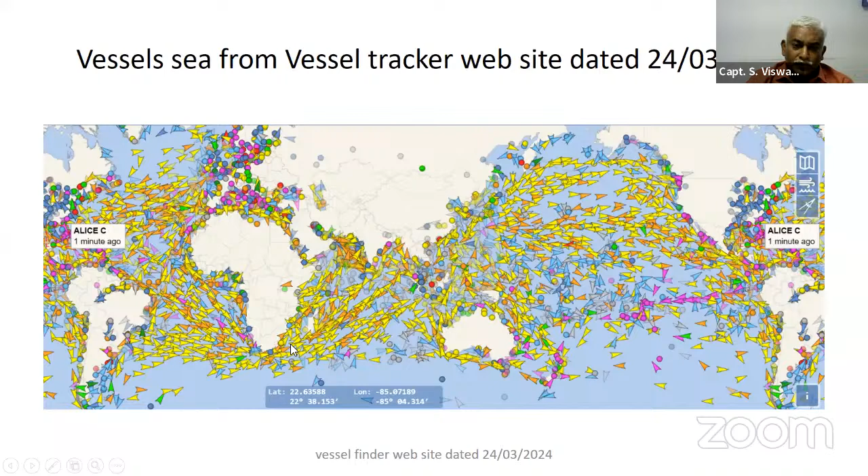When you zoom in, you will be able to see the kind of vessels plying in the seas. With this concentrated amount of vessels, how much has the sea been used for human purposes? So we have to begin with some early trade history, to understand how we have come to this level of shipping and where we have to think about sustainable shipping.

We have a lot of evidence in the Sangam literature, from around 2000 to 2500 years back, that trade used to take place through land as well as through sea, but the sea was the main route ensuring peaceful trade.

For that trade, they used to use monsoon winds, that was the advantage. About 2000 years back, there was no trade taking place across the Pacific or Atlantic Oceans, but through the Indian Ocean it was happening, mainly because of the trade winds and monsoon winds. These two winds ensured that a pattern was set for the trade.

Around 200 to 250 vessels from the Red Sea area, near Egypt or Arabia, used to depart during the southwest monsoon, come and trade in India, and when the northeast monsoon set in, all the vessels would return to the Red Sea. From there, they carried cargo through camels, transported it to the Mediterranean Sea, then took it to Rome or Greece.

That was the kind of pattern there. The pattern was set yearly, very well established, and the cargo trade was very much flourishing in this system.

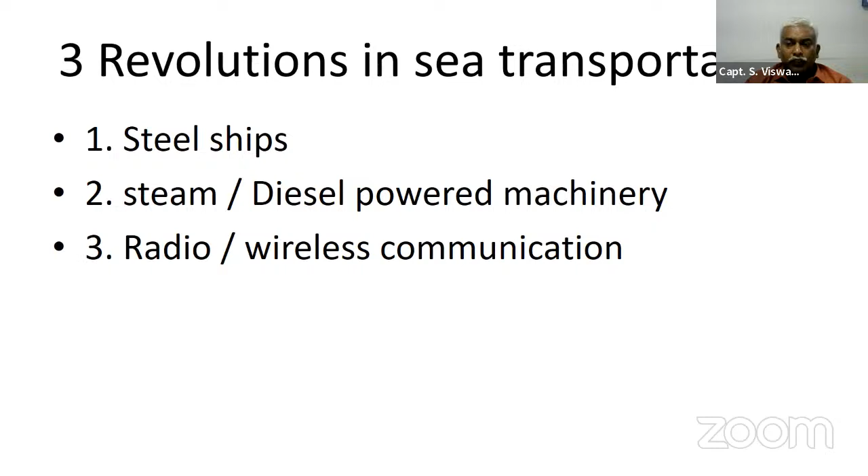Now we have to see what kinds of ships we have. Earlier, there used to be only sailing vessels. Now we have different types of vessels for carrying out specific cargo as well.

We can categorize them as dry cargo vessels, liquid cargo vessels, live ships, and offshore vessels. Dry cargo vessels generally carry bulk cargo, break bulk, or heavy lift, like coal. Break bulk is like machineries, and heavy lift is for machineries weighing maybe 300 or 500 tons or even more; ships are specially designed for that kind of weight.

Containers and ro-ro ships carry cargo on wheels inside, so we call them ro-ro ships. Different kinds of ships are available according to customers' needs.

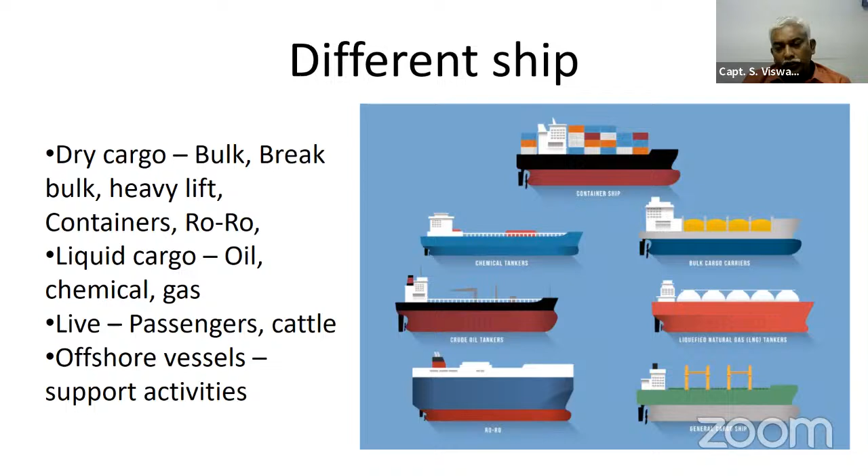Liquid cargo generally includes oil, chemical, and gas, all carried in liquid form. Live cargo includes passenger vessels and cattle carriers. Offshore vessels vary in number depending on the type, including heavy lift, pipelay, supply, support, transportation, well stimulation vessels, and even specialist vessels for installing windmills. These kinds of vessels operate at sea.

Now we have some data about the number of ships in the world. According to UNCTAD statistics 2022, there are over 1 lakh ships, of which oil tankers are about 11,000 plus, bulk carriers are 12,000 plus, general cargo ships are 20,000 plus, container ships are about 5,500, and other types of ships number nearly 53,000.

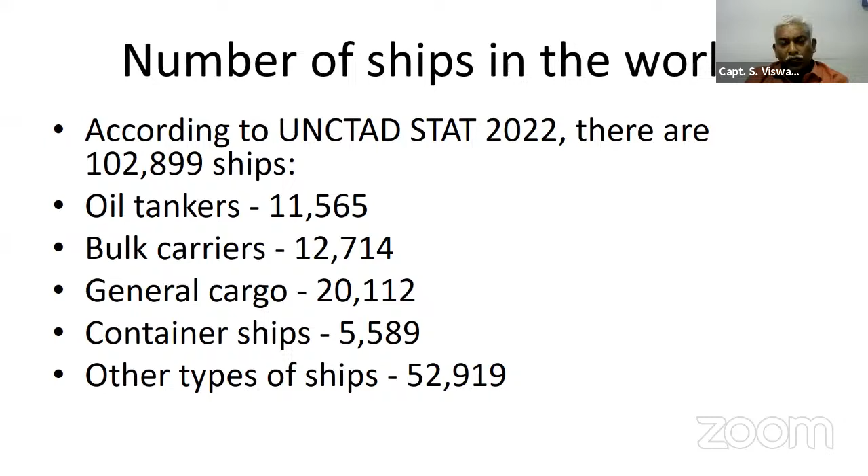These are the number of vessels plying at sea, transporting cargoes and involved in offshore activities. Since we are not all mariners, I want to give some understanding of each ship, like if you take one ship, what would be its dimensions, with some small calculations.

The containers are arranged in the middle, so it's very difficult to see across. But even otherwise, 400 meters means if you go from aft, that is behind, to the forward, the foremost part, and come back, you cover nearly 1 kilometer.

Its total cargo carrying capacity is 240,000 tons, and the engine runs at 80 RPM. Maximum cruising range power is 70,950 kilowatts, which is nearly 95,000 bhp. We can always do a comparison since we are all engineers, we'll have that idea. It can consume fuel about 243 tons per day, which is a very huge number.

28 such vessels have been delivered from 2023 until 2024. In 14 months, 28 new vessels of this size have been constructed. This indicates the demand for cargo transportation. If you go back even 1 year before, nearly 50 vessels, you can browse on the website, that is the kind of vessel that has been added to the sea to transport cargo. That means there is a huge volume of cargo being transported by sea.

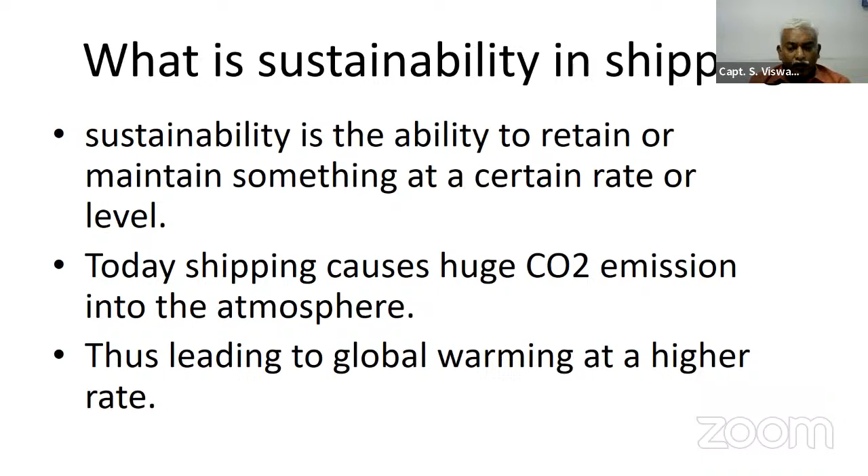In terms of sustainability, today shipping causes huge CO2 emissions. It is not only CO2, it is SO2, sulfur dioxide, nitric oxide, and some volatile organic compounds, which finally lead to emissions causing huge pollution damage and global warming at a very high rate.

What is the impact of CO2 emissions from the maritime industry compared to other transportation sectors? All over the world, about 20.2% of total CO2 emissions are from the transport sector. The global merchant fleet contributes only about 3% of global carbon dioxide emissions. Cargo ships are reported to produce 16.14 grams of CO2 per kilometer for each metric ton of cargo they carry.

Container ships average annually about 140 million metric tons of carbon dioxide. Bulk carriers contribute a total of 440 million metric tons. These are some statistics showing that shipping is also a significant contributor of CO2 in the world.

The International Maritime Organization, which is the regulatory body for the maritime sector under the United Nations, has revised its sights on achieving net zero emissions for the sector by around 2050. They want to go for zero CO2 emissions by 2050. Is it possible? That is what we are going to see briefly.

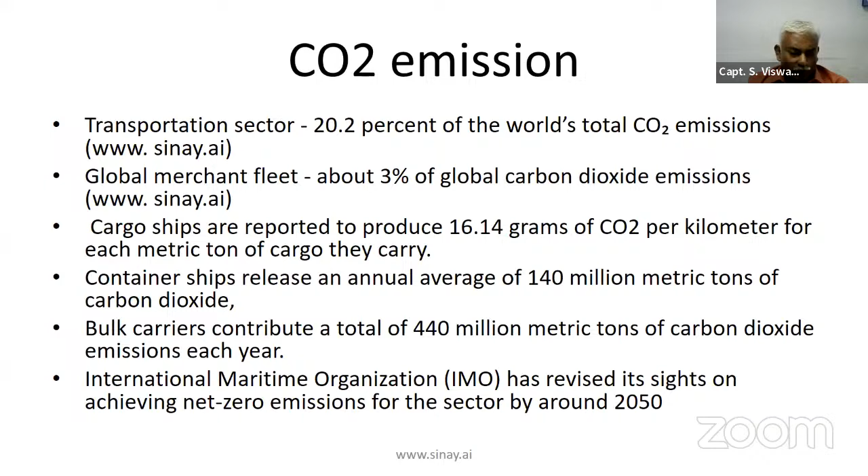They have set a sustainable development goal for green shipping. We can see which areas shipping can contribute to the sustainable development goals. SDG 14 is life underwater. Ships are responsible for proportion of marine plastic litter - life underwater includes fishery resources, biotic and abiotic resources. Ships are polluting, letting a good amount of plastic into the sea, but it is being controlled, and they can still contribute to SDG 14.

Next is SDG 7, affordable and clean energy. Fossil fuels remain the primary energy source for the shipping industry. We've seen one vessel consuming nearly 250 tons of fuel per day - a huge amount. That much burning of fuel adds pollution to the air.

SDG 8 is decent work and economic growth - shipping is a major source of employment. It's a good indicator: in world shipping, 12% of seafarers are from India. It's contributing good employment not only for the world population but also Indian populations. Nearly 16,47,500 seafarers are working at sea.

SDG 9 is industry, innovation, and infrastructure - optimize trade routes and technology to streamline. Size of vessels keeps increasing, so you have to minimize consumption through better weather routing and planning, reaching one place to another in a short time with less fuel consumption. This kind of activity supports SDG 13, climate actions, alternative fuels and batteries - very important for sustainable development.

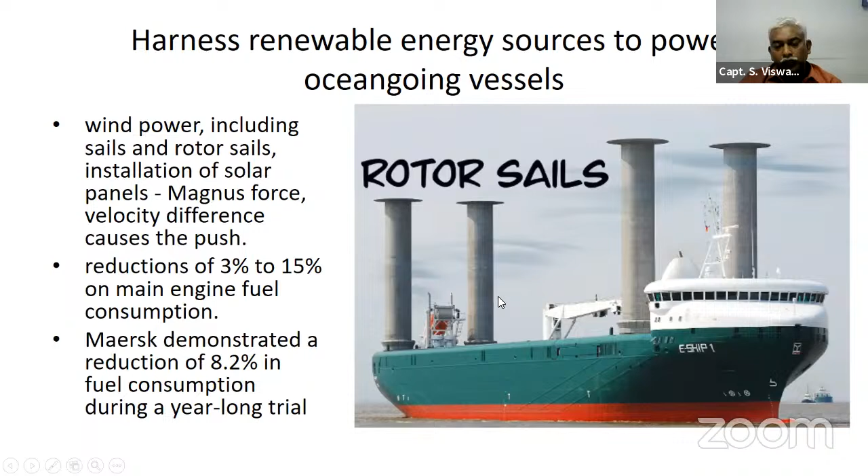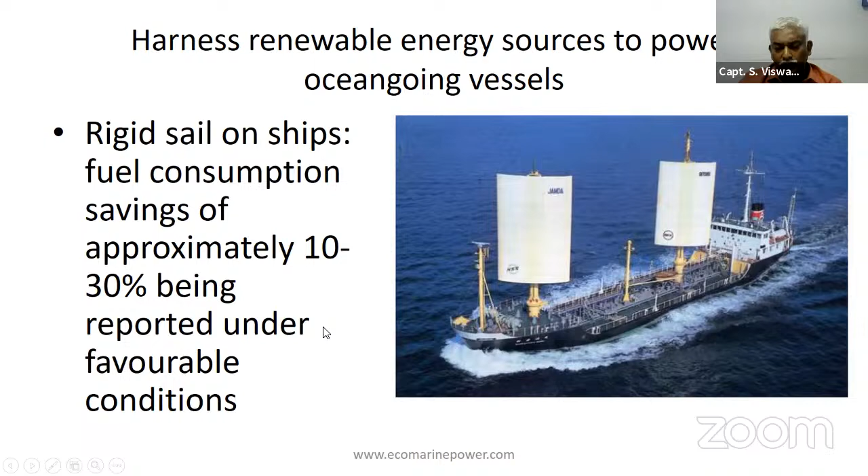Another one is fitting a rigid sail on ships. Fuel consumption savings of approximately 10 to 30% are being reported under favorable conditions. Again, whatever technology is coming in, putting it into practice is not easy - economic viability plus successful demonstration are all factors. These rigid sail ships are not practical to carry out yet; a lot of research needs to be done for efficient implementation.

Third important thing is the parasailing vessel - they put a parachute, and because of wind action it pushes the vessel. Under sail alone, the ship reaches 15 knots in some cases, because going against the wind direction is very difficult - wind has to be pushing you all the way. In optimum situations, fuel cost savings are as high as 50%.

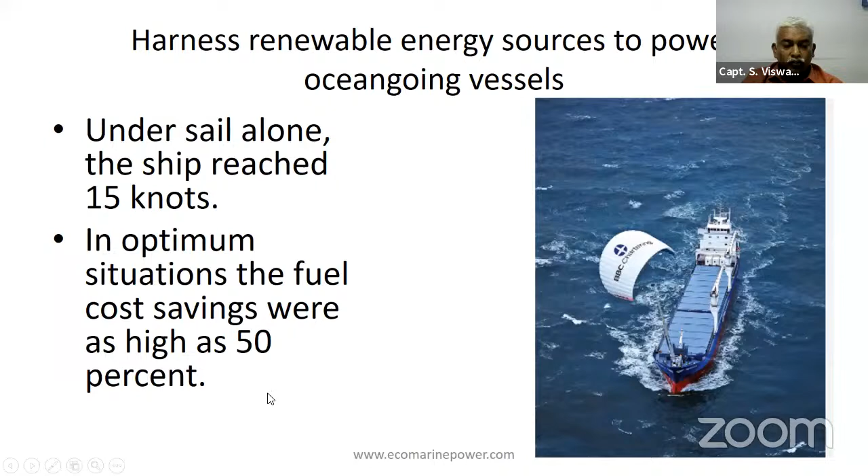The latest development in the maritime field is switching from fuel oil to cleaner alternatives. One is LNG, liquefied natural gas, where they fit a big tank on the deck of the vessel and use methane gas for propulsion. This LNG, when released into the atmosphere, is 80 times more potent for capturing greenhouse effect, and 30 times worse in the long term - so they are very dangerous. Unburned LNG released into the atmosphere is more dangerous than CO2.

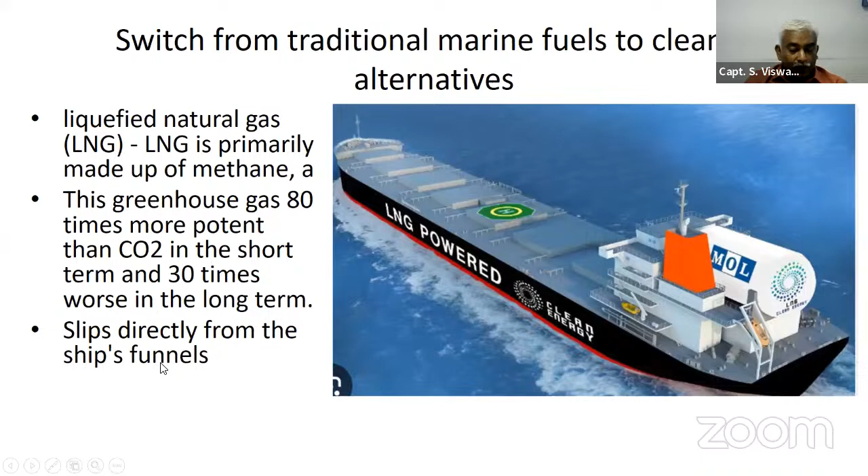But with present technology used for LNG-fueled engines, there's a lot of unburned LNG mixing with the air, which is really causing concern. They started this a few years back, and now realizing this, they're taking a step back and going for a better alternative. Slips directly from the ship's funnel are an important factor preventing 100% success of these engines.

Another alternative is pure hydrogen or hydrogen blends with conventional fuels, which can be an alternative fuel for ship propulsion. It has low energy density, which would increase the storage needs on board the vessel.

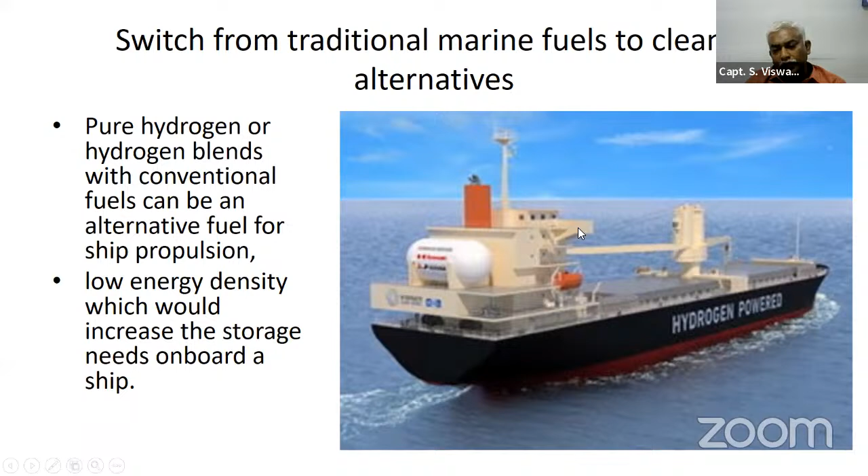Again, you need a huge amount of hydrogen for transporting the cargo, because it needs a good amount of energy for the main engine to run. So for coastal vessels, or very short distance small vessels, you can perfectly use it. But for ocean going vessels, where a huge amount of cargo is transported, it is not practicable.

Another thing is biofuel like methanol and ammonia, a convenient way for shipping companies to reduce their carbon emission. They just add it into their fuel, so that the biofuel content is increased, and they can have a cleaner exhaust, so the pollution can be minimized.

The other thing is battery electric or hybrid systems. Battery packs require a lot more space. You cannot get that amount of energy from the battery to run a ship. But of course, there are small boats, and even some vessels - we had one vessel where payloaders of huge size for shifting cargo within the vessel were battery operated. So small equipment like that can be used with battery power. But for running a vessel, we don't have the battery operated engines yet.

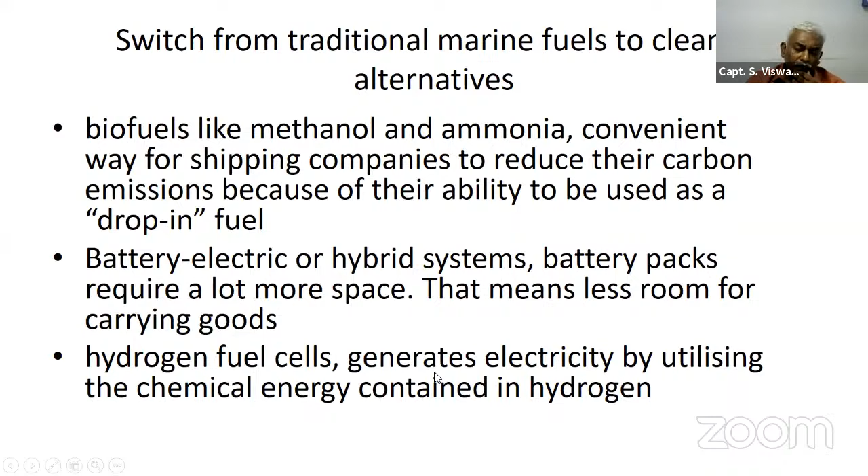Hydrogen fuel cells, another technology being used now, generate electricity by utilizing the chemical energy contained in hydrogen. It is the beginning now. There are small vessels using it, but a lot of research and development needs to be done for efficient implementation. So this is another example, a hydrogen fuel cell vessel.

The country's first indigenous green hydrogen fuel cell inland waterway vessel was launched by the Prime Minister in February, just less than a month back. It is given by the Tamil Nadu government to the UP government, for transportation of passengers in the river Ganga.

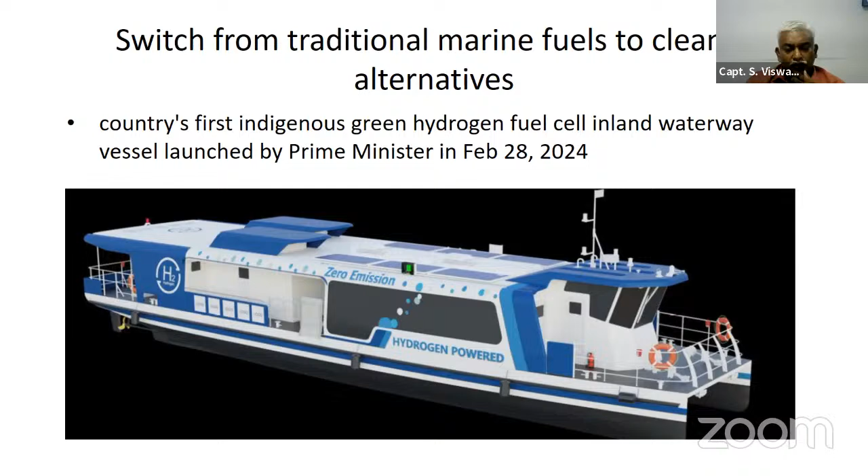Another way of reducing fuel consumption is through new technologies, optimizing design and equipment. When you design a vessel with a bulbous bow or stem, changing the design slightly will reduce fuel consumption by better passing through the waves and so on.

They have a smart design to use less fuel, like big propellers, a system to make air bubbles to reduce water resistance, and hybrid scrubbers for cutting down carbon dioxide emission by 3 to 4%. These are the new vessels. Normally they are fitted or equipped with this kind of equipment to reduce carbon dioxide emissions.

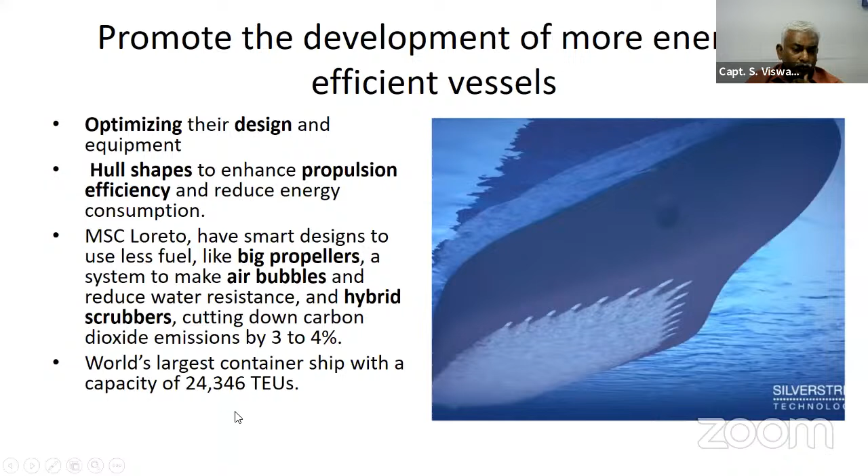This is one of the container vessels, the largest and latest one, with 24,346 TEUs. Another factor they consider is making the hull very smooth - nicely painted, with the minimum number of obstructions on the hull, so that when the water passes or the ship passes smoothly through, the speed is maintained and not reduced because of the hull conditions.

Upgrading the engine to a more energy efficient model is also very crucial. Nowadays the changes and developments taking place in engines are very fast. New technological development is implemented in vessel design as well as in machinery very fast.

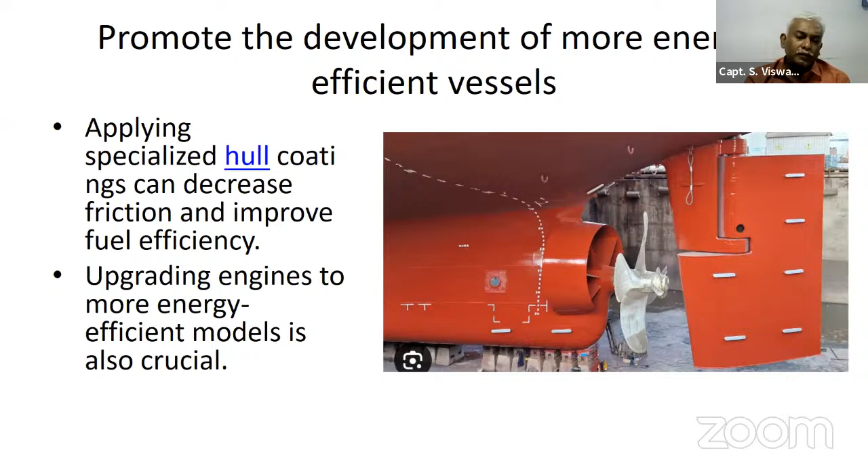And you see on the hull there are some white things - we call it an anode, mainly for corrosion prevention of the propellers and the hull. That cannot be avoided. Even with the best possible smoothness we plan for the vessel, this kind of friction will always be there. We cannot avoid it, but it can be minimized.

Utilizing slow steaming to reduce speed is another important factor. When we were working in our earlier days, we used to plan so nicely that, say, tomorrow you are going to reach the port maybe at midnight, but you will be going inside only at 6 or 7 o'clock in the morning. So for those 6 or 7 hours, you can reduce your speed so that you directly approach the port and get berthed.

So with slow steaming, the fuel saving will be exponential. That way we can save a good amount of fuel. It is through planning and better operation of the vessel by the master and chief engineer who are on board ships.

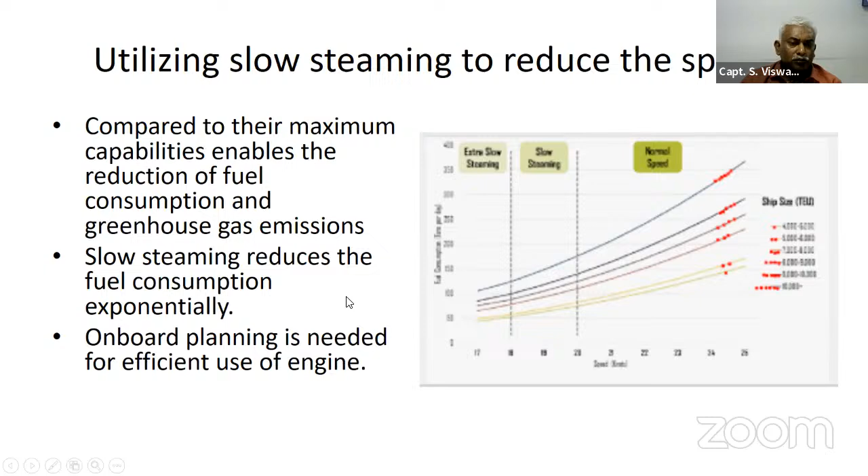Another important factor we consider when crossing the Atlantic, Pacific, or even Indian Ocean, where the passage is about 10-15 days, is weather routing. Depending upon the weather conditions, if you are heading into the wind, you'll do less speed. But if you take the wind on one side of the vessel, you'll do better speed. So algorithm-based softwares are available, and weather prediction is possible up to 15 days ahead.

So they plan the best route very smoothly, so that they do better speed along the sea and reach earlier, and by that way they can reduce fuel consumption. So weather routing options are plenty available nowadays with the new softwares.

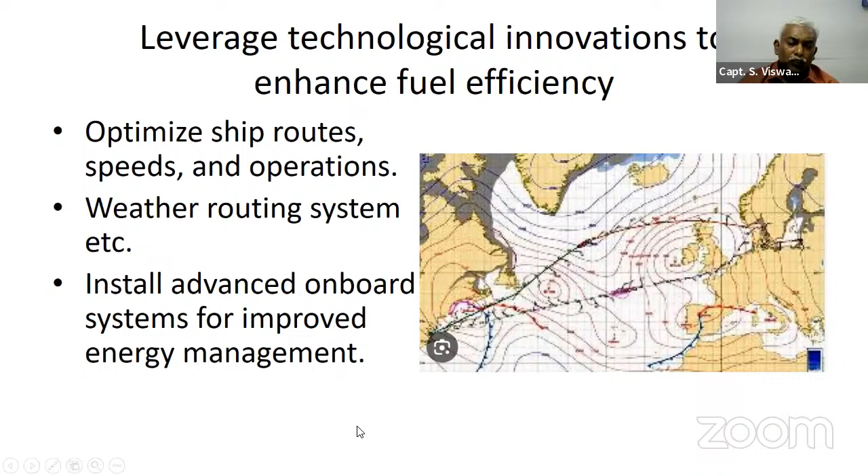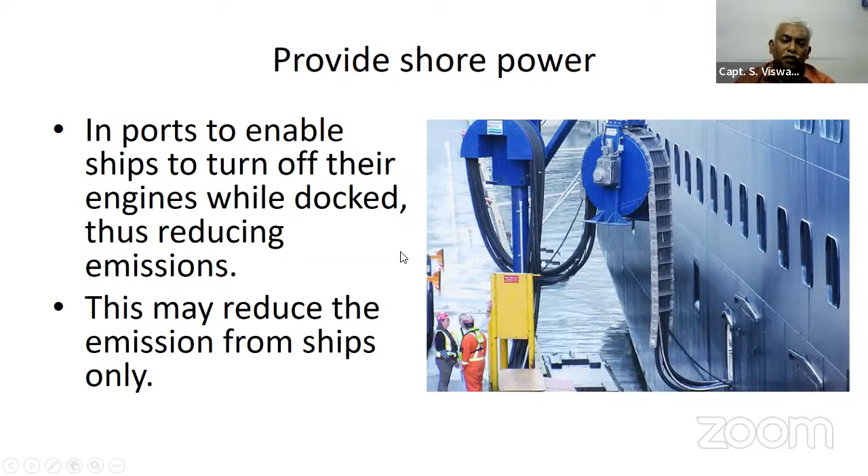Recently, another thing is that when coming to port, they say shut down all your machineries and generators, we will supply you the power. In ports, the engines and generators don't make noise since power is received from the shore. But ultimately, while you may not be polluting the air there, wherever you get that power from, the pollution is already given off by that factory. Still, to some extent, the port areas don't get polluted much. Many harbors or ports now supply shore power for vessels.

There are some policy measures that encourage companies and organizations to invest in carbon offset projects as a means to compensate for their emissions. This is a government initiative, and many countries are already doing it, even the International Maritime Organization is promoting this.

For transportation of empty containers, very careful planning can be done. Container transportation takes place one way with loaded containers, and the other way with empty containers, because container trade is the only trade where both loaded and empty containers get traded. Even if you want to hire empty containers and they're not available, you have to import from other countries and pay a lot of money for that. So empty containers and loaded containers both occupy the same volume of space.

To avoid that, what they do now is make collapsible type containers. In place of one container, they can transport 4 empty containers. In that way, the transportation of containers on the other route is optimized so that the cost for transportation is reduced, which ultimately leads to less fuel consumption. This is a new concept that has been introduced and is going on nowadays.

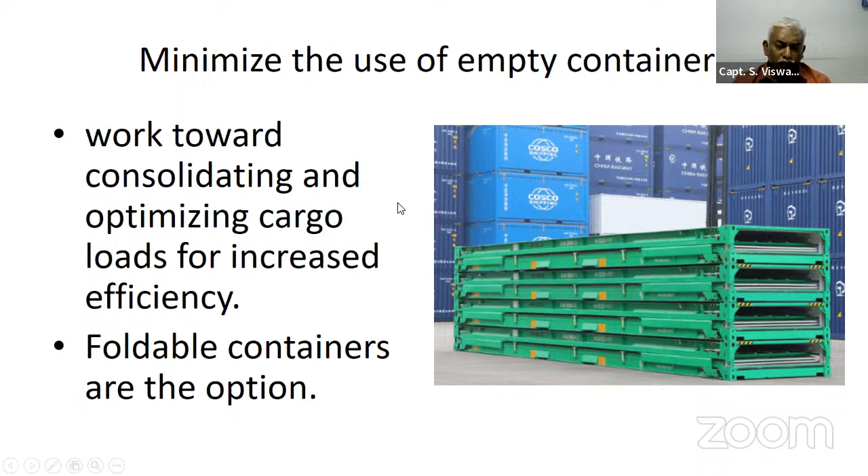Another practice is to train seafarers and shipping professionals on sustainable practices and eco-friendly technologies. This is an ongoing project, and even during my time there was a lot of training and push from companies to minimize fuel consumption at sea - reduce speed wherever possible, no need to go for very high speed, and practice great circle routes to reduce distances.

Great circle routes are the shortest distance between any two places, but they are likely to have worse weather conditions. So you have to play with the weather routing system to get the best route, and accordingly plan the passage.

Careful planning of the efficient use of generators wherever possible - try to use minimum generators. Normally ships have 3 to 4 generators, and for routine operations, one generator is good enough. But in port where you do cargo operations, they generally keep 2 generators, with the third as a backup. So when we carefully plan it, we can minimize fuel consumption there too.

Regulatory measures are also applied at the engine design and construction stage. They make something called the Energy Efficiency Existing Ship Index - some kind of number calculation for the efficiency of engines in reducing pollution. Accordingly, they give you a number, and you get some kind of concession.

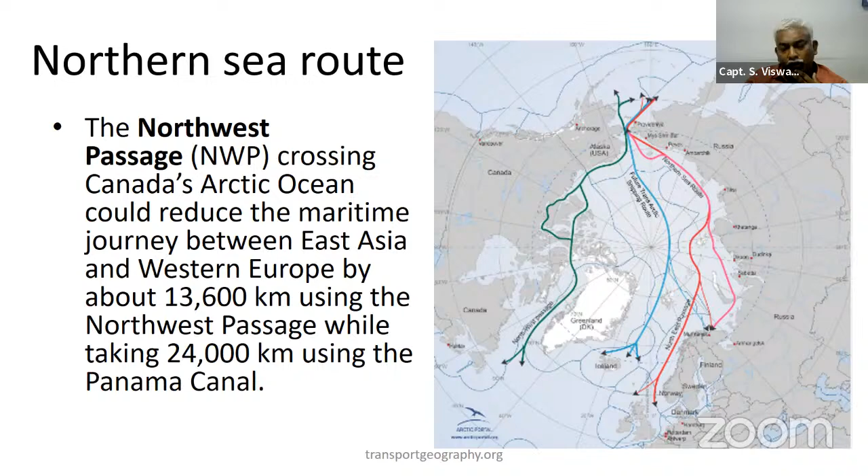So that route is also in the pipeline, where they are planning passages for the existing Northwest Passage as well as the Northern Sea Route. More vessels will be plying these routes, reducing fuel consumption by shortening the days. But you have to weigh between fuel reduction and the melting of the ice — it is a very tough decision to make.

Now, if you see how we are going to achieve net zero by 2050, the United Nations has taken 8 measures which they are looking into for net zero. In that, none of them are related to shipping, mainly land-based transportation, factories and all. But shipping is also important, and we have to reduce it too.

But in that line, it is not in the top 8. Lot of measures have been taken in the shipping industry for reducing oil pollution, air pollution, where the CO2 emission is there.

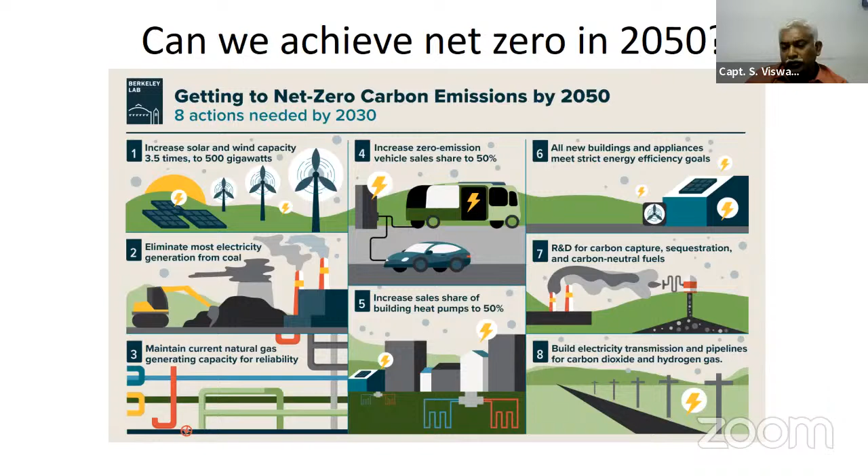And the question is, can we achieve net zero by 2050? It is a debatable question. It is not possible. I can give you one example.

LNG was considered an alternative for heavy fuel oil. But now, within a short span of time, maybe about 4 or 5 years, they said LNG releases a lot of unburned gas to the atmosphere, which will be more dangerous.

And second thing is the amount of cargo transportation taking place. Earlier, it used to be for supply and demand, where you have more cargo, you take it to the area where there's less cargo. But nowadays, it is not like that.

I can give one example. Windmill blades are manufactured in India, particularly in Tamil Nadu, and exported to foreign countries. But Tamil Nadu is the leading state in India where a lot of windmills are installed, and all these windmills are imported from foreign countries like China.

So that means the supply and demand is not according to where you have the items in high quantity or not, it is according to our need. So we are exporting the windmill blades outside, and for our own use we import from outside. That means there is a lot of transportation involved, where a lot of fuel is burned for these kinds of activities to take place.